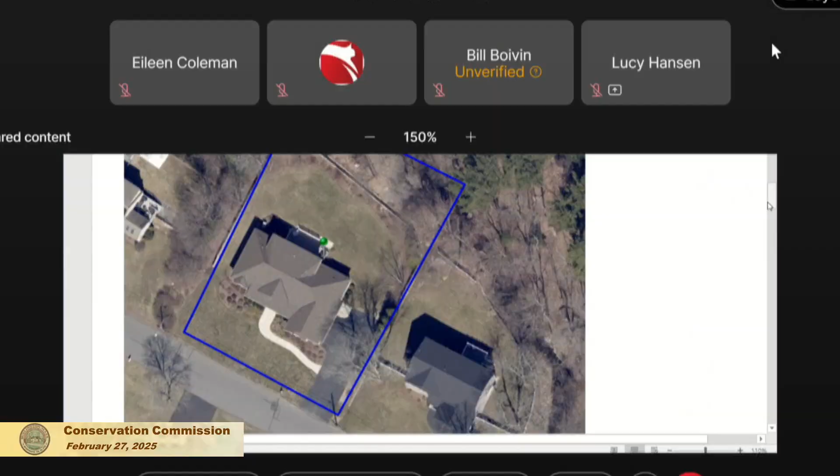I would like to submit something that we just got from the contractor, from Pandolfo, if I could give you that. It's actually a letter that serves as his written guarantee that all the construction regarding the building of the new home for the Gallaghers was completed as per the plans approved by the town. So he has your letter that says that, and also he has documentation of the invoices for all the materials. Can I give that to Eileen? Thank you. Great, thank you for doing the extra legwork.

Okay. Eileen or Lucy, you have any comments on this one?

Only to say, David Romero did his best, given the fact that it was a few years ago, it was complicated, there were a number of changes, like he just explained, and there was no way for him to see underground without digging up the yard, just to confirm that the chambers were built.

We went out there yesterday. You could see one of the red osier dogwoods that was required for the order of conditions. The rear behind the fence is looking good, it's looking clean, it's looking clear. There's not a scrap of yard debris or any dumping back there. Trees and shrubs in good shape. We couldn't see the yard under the snow, but it all looks very well kept, and they clearly do not touch behind the fence where the stream is.

I have no issues with issuing this certificate of compliance. Your question was just about the chambers - how do we know they were built? It's tricky, so I think this letter is about as good as you are going to get in terms of determining that they were put in as designed.

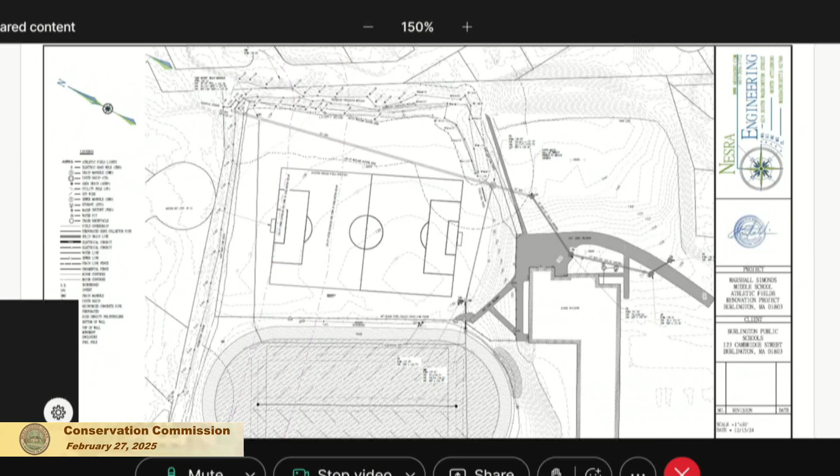There is an access drive by the school with a turnaround pedestrian walkway that connects to a residential neighborhood. And there's resource areas on the north side and the west side, and the facilities used for recreation and sports. It's a natural grass field.

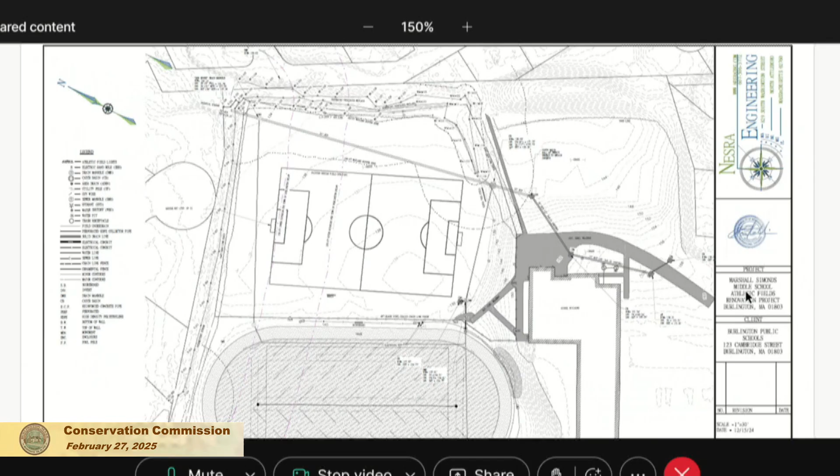The left side here is an intermittent stream, and we understand for Burlington bylaw that is treated as riverfront area. So it's mapped with a 200-foot riverfront, and then the wetlands have their 100-foot buffer zone. And I think we have the smaller buffer zone there, 5 feet if I'm not mistaken. I can't see. And if we go to...

Can you point out the 200-foot riverfront on that? I'm having trouble. Sure, it's right here, right up between there. Okay, thank you. And then the other 100-foot buffer zone is here.

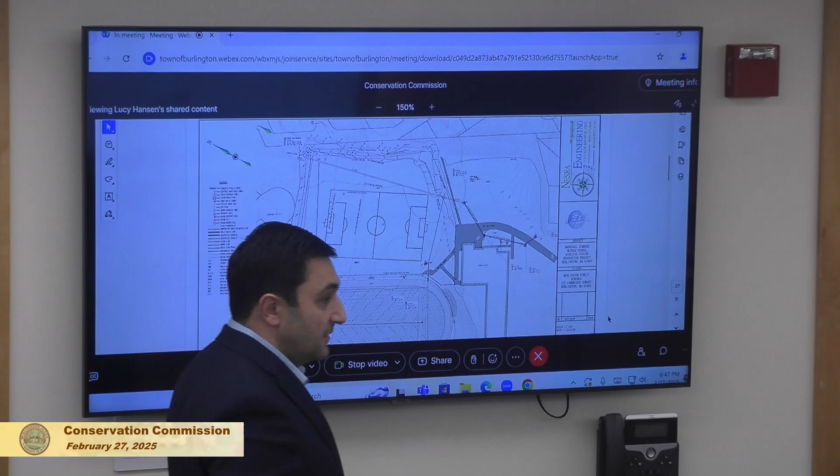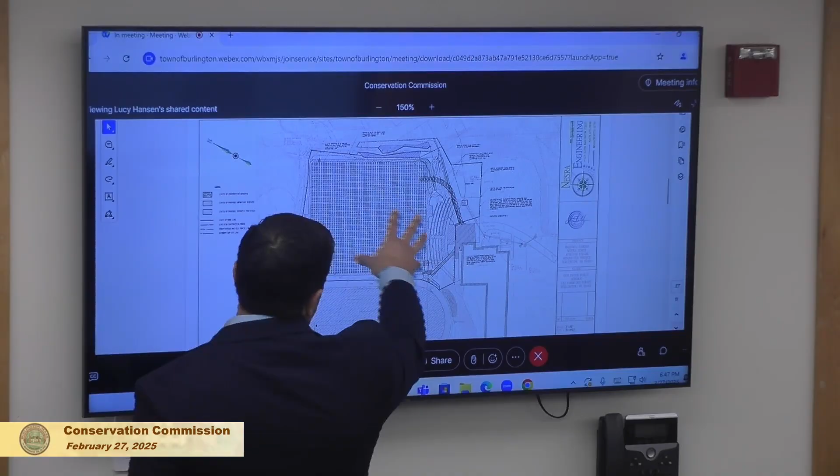If we go to the next sheet, this is our demolition plan. What we propose to do is remove a section of the pavement by the school building to regrade and provide ADA accessibility in that area. We're proposing a construction entrance from that location. We also have an alternate route if things get congested or closed out from the track side.

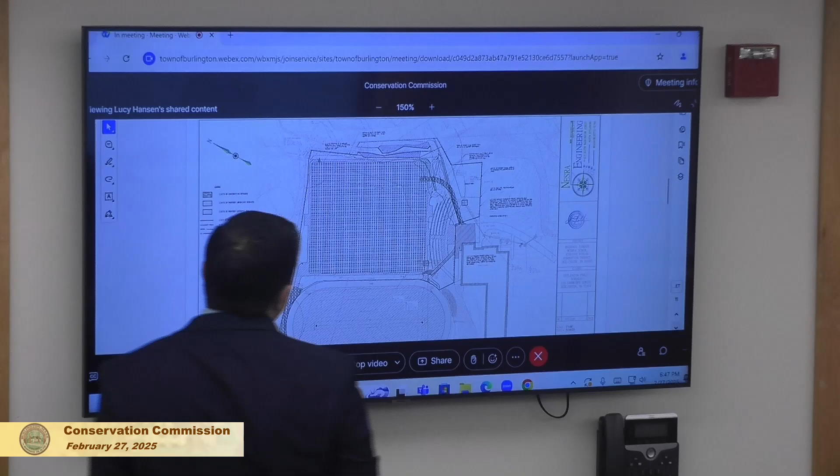We propose to remove the topsoil within the proposed synthetic turf and walkway areas. The organic material decomposes over time and isn't suitable to be underneath fields. So that will be removed, stockpile tested, and taken off site.

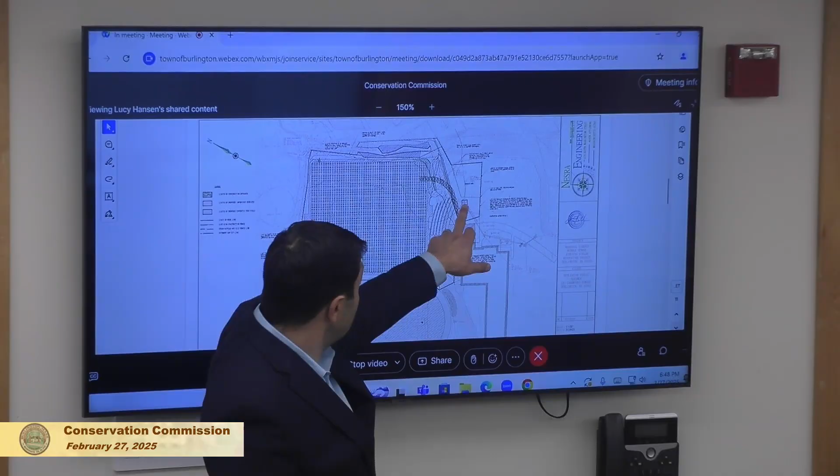We do have erosion control around the perimeter. All catch basins will have silt socks and protection with wattles around them. This one is currently filled with debris, the pipes aren't visible, it's full of dirt and sand that's washed off the parking area. We propose to fully clean it, inspect it, and replace it if need be.

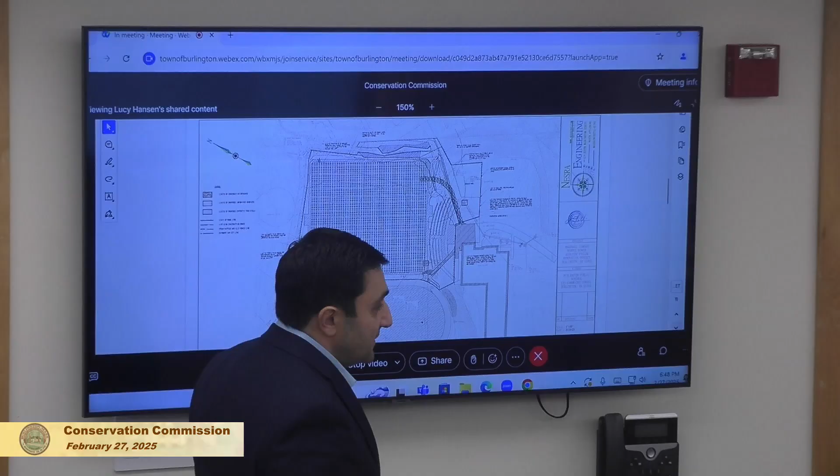There's a structure here that has some plastics and cups, etc. We propose to clean that as well, and some of the line is to be replaced. So now if we go to the next sheet, this is the proposed layout.

These are two synthetic turf fields divided by removable netting down the middle, so it can be removed and orientations can be reversed or changed based on practice needs, or fields could be split into fours for practices and so on. The red is just red turf to designate safety zones for out of bounds, while the green is just green synthetic turf.

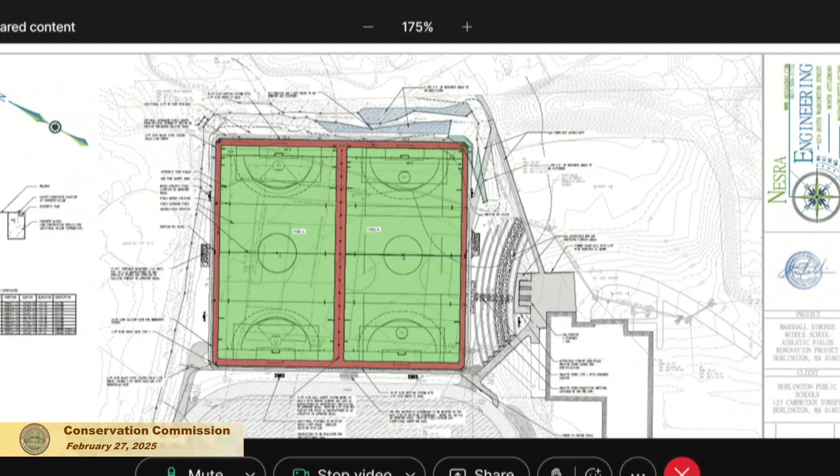We're proposing to provide an ADA accessible walking path all the way around, a 6-foot wide walking path. We're also proposing to improve ADA access to the neighborhood, make it ADA compliant, and come down to the field this way. So you'd have ADA parking, walking or going down the ramp, coming across here, with some spectator seating on either side, as well as terrace seats.

The two concrete areas in between the seat walls are ADA accessible routes for seating; the rest will be vegetated. We have a rain garden proposed in this corner, which will intercept runoff from the parking and turnaround, which currently has no treatment and goes directly into this catch basin that outlets into the resource areas. So we're proposing a significant improvement for that area.

We're providing emergency access over by the track and to the field, should there be a situation, and better connectivity from the track to the turf fields.

This is a section we discussed as potential wetland replication, but there's another area down here by the track which may be better suited. We're open to board suggestions, and we can go back and modify that to meet any requirements.

At the last meeting, the informal one, there were questions regarding whether we're getting any closer to the resource areas and what our separations are. Currently, there's a fence line all the way here.

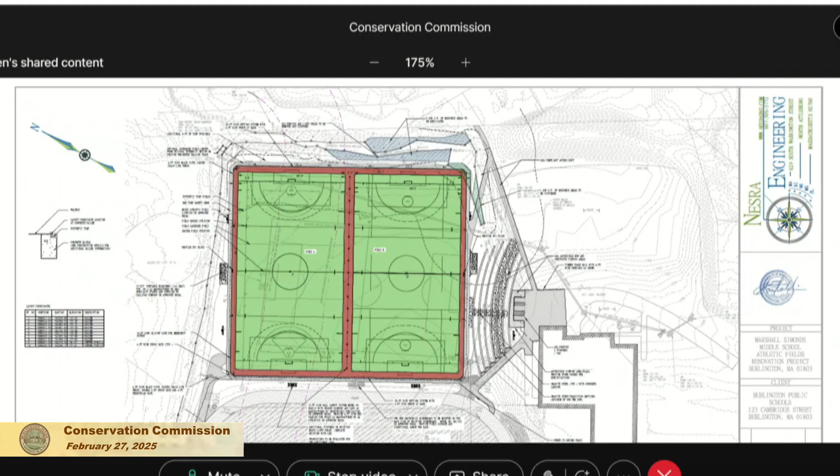In here, there's fence blocking potential wildlife pathways. We're not sure what that serves or why it was there. We have some photo documentation. We want to remove it if possible, to open it up.

There are some entanglement possibilities where the fence is folded over - it's a tripping issue, things can get stuck, and it could be not beneficial to animals. There's quite a bit of rubbish out there, some tires. We're proposing to do a full cleanup of the resource area. This work would be done by hand by the contractor, who would go in and remove everything they can and put it in a dumpster.

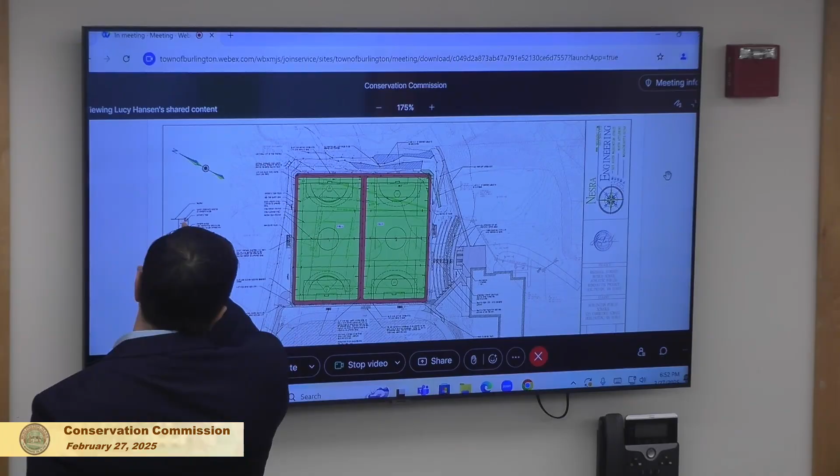This curb here - I have a section to talk about how we retain the infill, but I wanted to show a detail of the curbing. There's a lip to the curb, and the turf sits somewhat lower than that lip, so if there's any motion or migration, there's an area all around the entire perimeter that would catch the infill migration.

It's hard, it's very hard to see from here. Sorry - is there any chance you could point at that one instead?

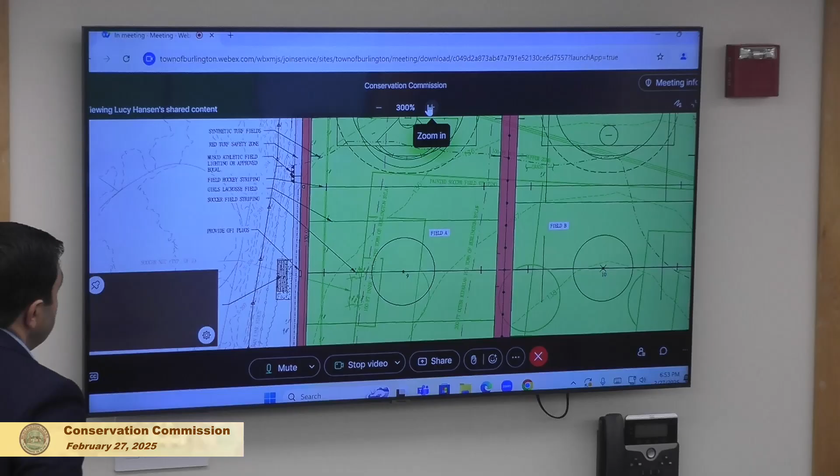Yeah, sure, this one is easier to see, there's a big glare off that one. Yeah, I didn't quite understand that.

Do you mind explaining that part again about the lip?

So this would be the walkway, this would be synthetic turf. The synthetic turf is held by a curbing system that goes around the entire perimeter, a concrete curbing system. The infill will not be set all the way to the top, it will be set about a quarter-inch below, so any migration, small amount of migration, would be trapped there.

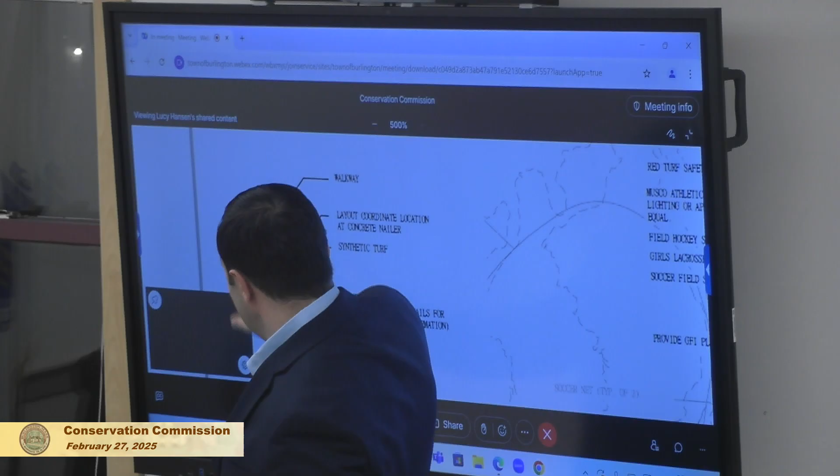Part of the maintenance would be to rake that back if need be, part of the typical field grooming and maintenance process. If it was to go over, you would see it on the curbing - there's a fence post here, it would get stuck on the curbing or pavement before it hits grass. So you'd see it on the 6-foot walkway. Exactly, you would have to cross the walkway, which is around the perimeter.

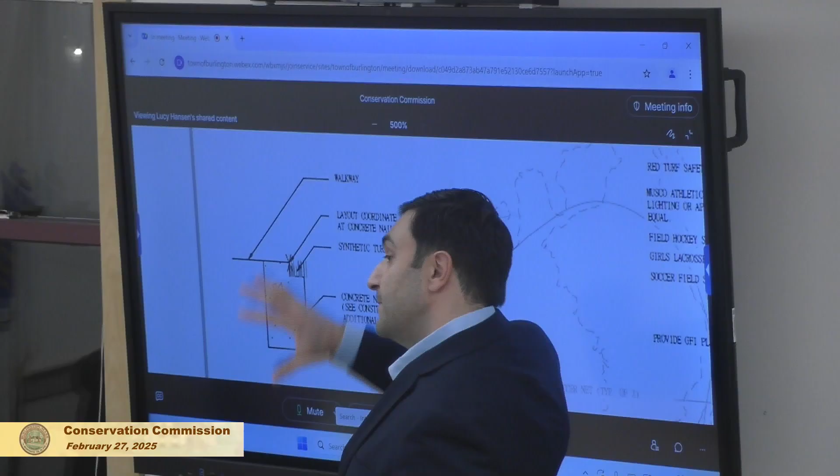Then we have grass channel swales in many of the locations at the low points, which would be the third place it would get trapped, and that would be part of maintenance as well. Then if nothing was done, it could migrate to the resource area. So we have checks along the way to stop this, if it was a concern.

We also addressed it with the turf, which I have some slides for you that shows monofilament turf versus slit film turf. Monofilament is individual fibers. Slit film is a section of fiber like this that has slits in it and folds over.

So the monofilament holds the ball up for better play. The slit film folds down and traps the infill in place. That prevents movement under your feet too much, so kids don't slide as easily, they don't roll their ankles, they don't get hurt, but it also retains the infill in place.

So it has both of those fibers? Yes, so the committee decided on a dual fiber system to provide both benefits.

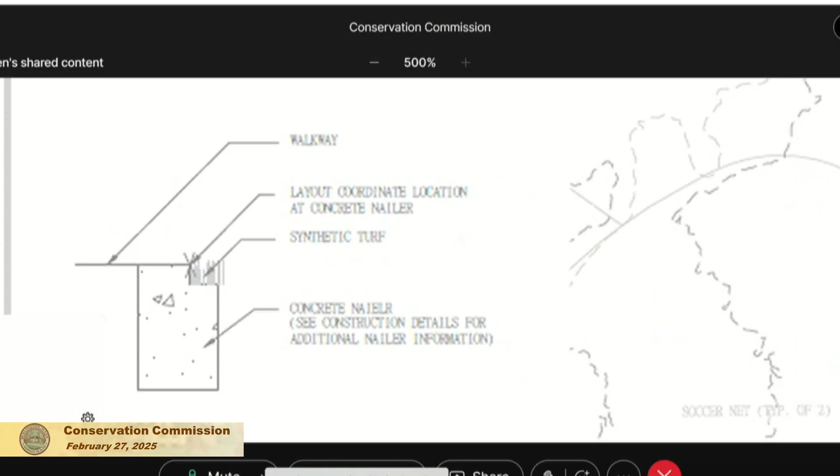Thank you, before you move on from that - you mentioned there's the lip and the walkway, and a swale? Could you explain that, the grading, I missed that one. We're not there yet, it's on the next slide. Do it at your pace, I'm sorry, go ahead. Zoom all the way back out. If you weren't going on to that next, don't worry about it.

No problem. So this side is the high point of the field, at roughly 139 elevation, I think it's 138, 37, 36, this becomes the low point.

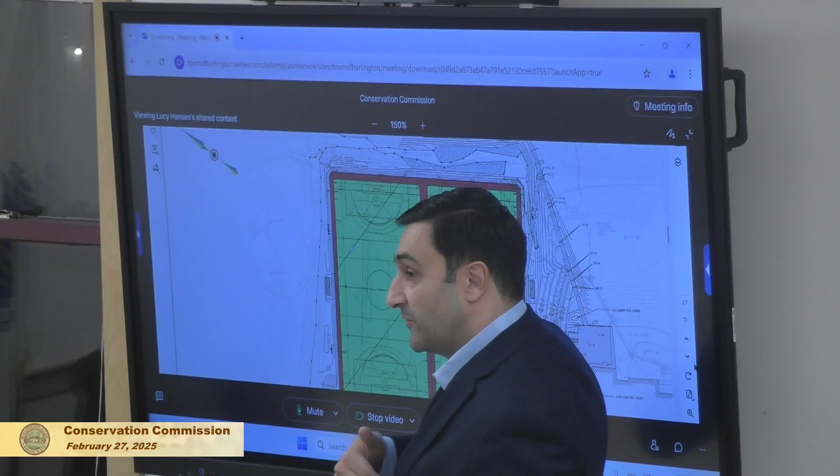And we have a swale created here to reduce any runoff that may sheet flow off the field, which isn't likely, because the way the field's going to be designed, most of the flow is going to be vertical. But in an event, if there is a significant flow, it would go to this area, slow down, and go out this way. This is part of the grass field now, so we're not encroaching towards the resource areas with our walkways or turf, but we're going to propose to utilize that area to catch runoff.

Similarly, we're going to have a low point here and here. So any of this runoff would be directed to this. And if there happened to be migration, those would be the locations to go clean and maintain.

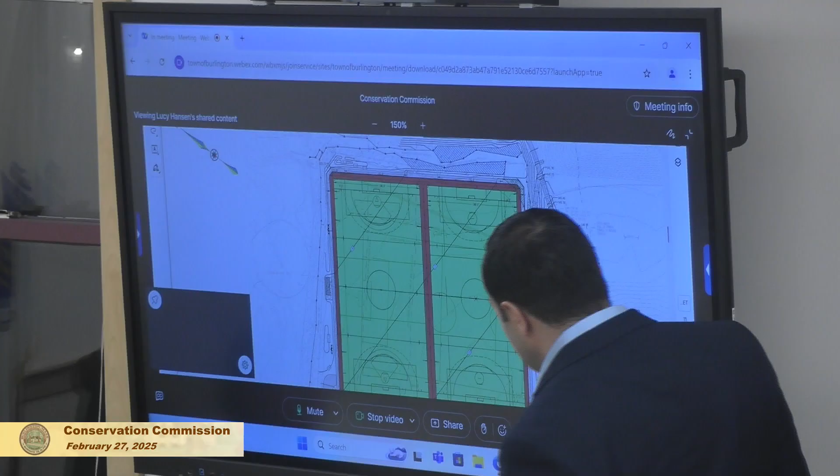For the parking area, you can see the sheet flow travels this way, across the spaces to the rain garden. We have a detail of how the rain garden will work - it's a depression with plantings. The catch basin is elevated, so that would have to fill up before it goes into that. It promotes infiltration through the specific soil that's for rain gardens, to a perforated pipe, which then outlets to that catch basin, which we're proposing to clean and replace.

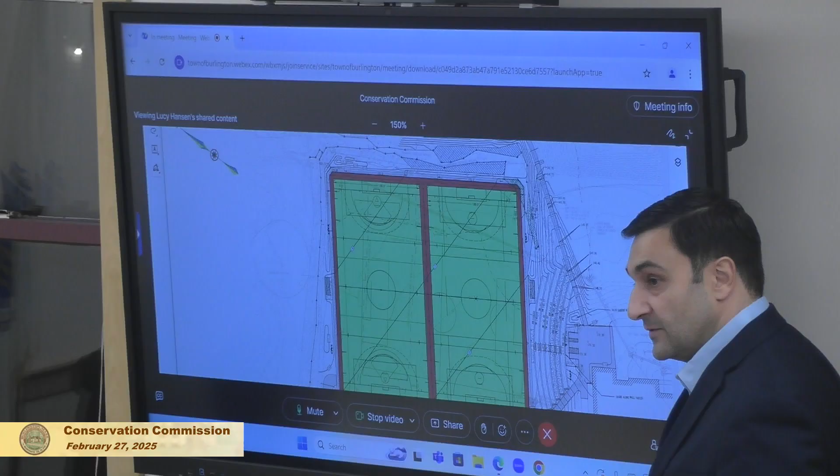Where's the detail of the rain garden? It's on the very last sheet. Is that one next? No, I believe it's there, I just hadn't noticed it yet. Sure.

If we go to the next slide, this is our drainage and utility plan. These dark lines are what's called flat panel drains. They're 12 inches wide, about an inch high.

These dashed lines are the flat panel drains. They go under the turf carpet, under the stone, above the filter fabric. Is that like perforated pipes? Yes, they have openings, but they're wrapped in filter fabric.

The turf has an infiltration rate of greater than 70 inches per hour. The base we designed is a minimum of 25 inches per hour. So the intent is when rain falls, it travels vertically in, through the turf fibers, the sand and crumb rubber, or whatever infill system there is. There's a backing, a 2-layer backing with perforations, which filters through that. Then there's a denser drainage stone, still very permeable, but a smaller material so you can laser grade it perfectly for the field.

Do you have a section? I do, and we can go through that at the end with the rain garden. The intent is to have these flat panel drains flowing into collector pipes, which are perforated pipes in stone trenches, which then ultimately come to this structure we're proposing to replace. That's the same structure that receives runoff from the parking area and upper grass area. So we're proposing to outlet to the same location, which already flows to the resource area. We're not cutting into the resource areas or adding any new piping into it.

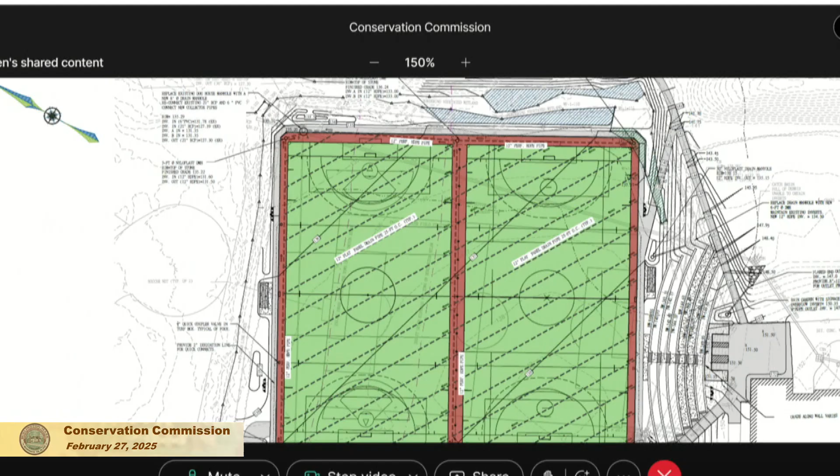You mentioned the fixture in the upper left of the field that's going to be replaced. What is it being replaced with? A new 8-foot diameter manhole. Currently the manhole is built out of cinder blocks, it's not in good shape. I don't think it'll last more than 10 years, and we don't want to put a multi-million-dollar facility so close to it and risk damaging it. It also doesn't have a deep sump, it doesn't have a hood. We propose to add those things.

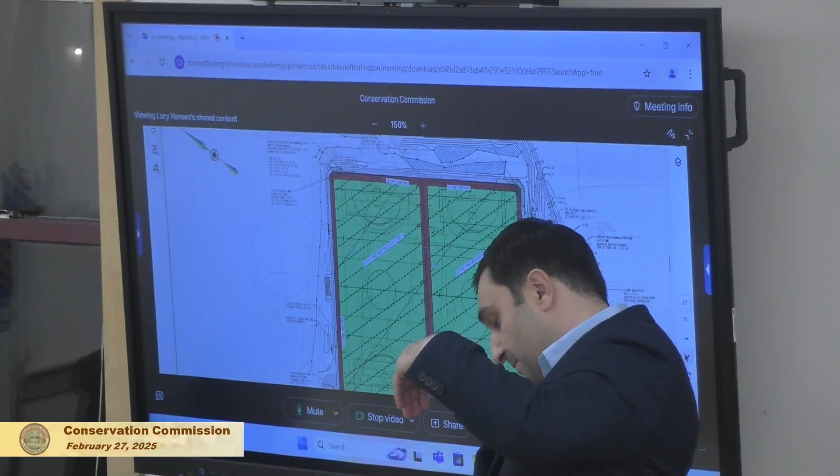The hood covers the outlet pipe, so if there are oils in the structure, they rise to the top and can't enter the pipe. Then there's a deep sump on the bottom, so any sand and heavier material settles to the bottom, and only clean water goes up through the hood and outside. It's fairly standard, but that's what we're proposing to replace - a catch basin, not necessarily a manhole, but a similar structure.

It's not a water quality unit per se, though I think similar catch basins provide 25% treatment according to DEP. This catch basin is feeding - the leachate is being collected there, yes, everything underneath will be. And the parking lot too? No, the parking lot ultimately gets there, but it goes to the rain garden first, then to this catch basin, and then connects there.

So it goes through the rain garden first? Yes. Got it - so you have the pipe from the rain garden to that point? Yes, we have the pipe for the catch basin structure, and any surface flow will get there as well, but everything's directed to the rain garden first. It goes underneath the turf, the pipe from the parking - yes, it's pretty deep, well under the field. The drainage from the lower field also connects to that same location, same pipe, further down.

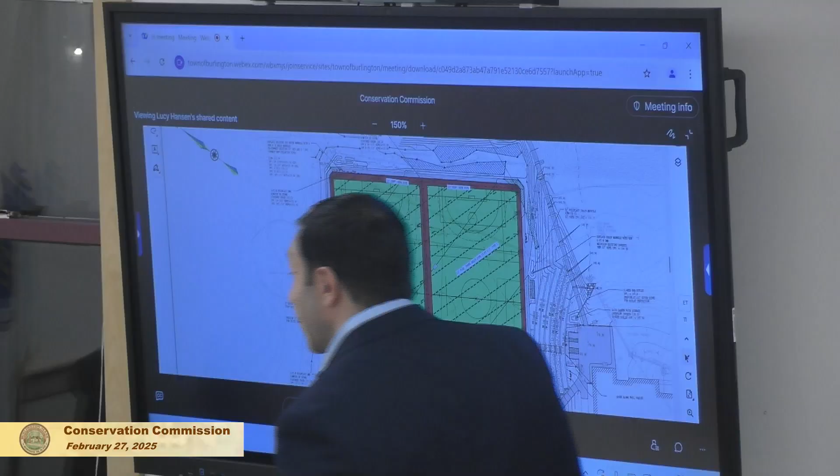In the future there's some talk about renovating the lower field - would that require any drastic changes in drainage? This field is connected through here, so that would remain unchanged. The larger lower field renovation should be limited to removing the infill and fabric, putting new fabric down, and redoing the track. But you're not changing the turf? Not at this time, but that's something in the future. And not changing the grade down there - no grading. If in the future a pad is put down, a thin layer would need to be removed to make room for it.

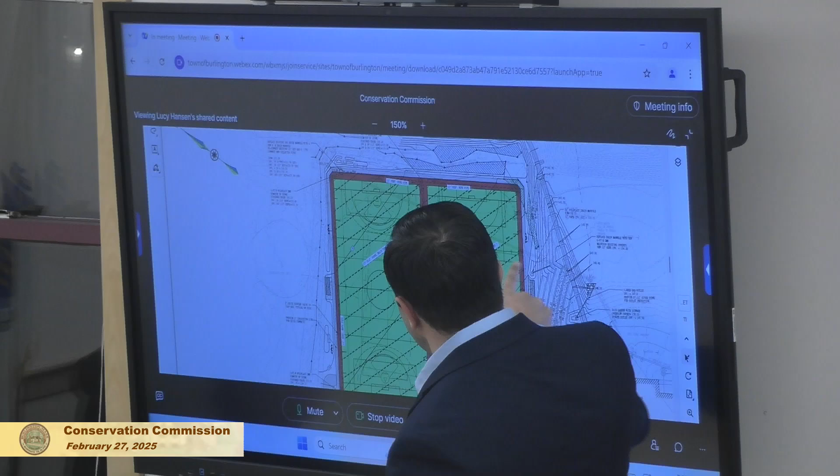Is that pipe currently being used for drainage from the field from the cinder block drain, and not the one that's filled with debris mostly? So yeah, not much is getting through there now because it's filled. There's another catch basin here that we were able to expose and look at, so that's getting runoff from the walkways and this hill. The rest from the lower field is coming in from there, and then it outlets just into the wetlands, about 4 feet or so.

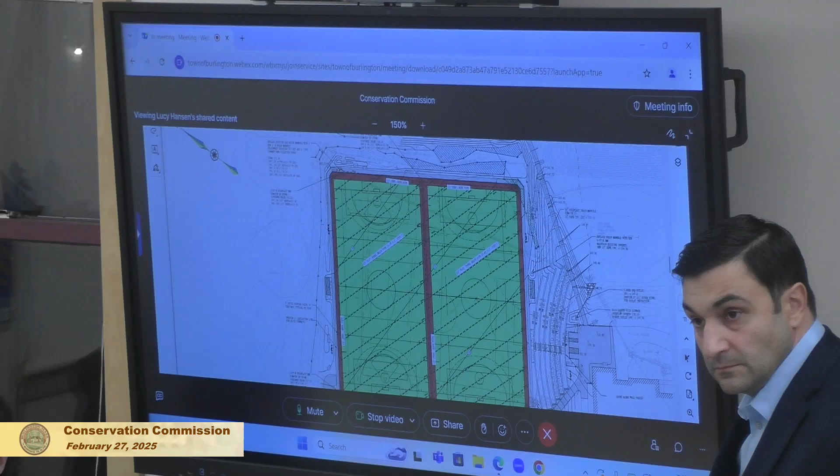Just for clarification, this pipe here is existing, and that is where, if this was working properly, that's where all the drainage would be exiting. So we are connecting to an existing pipe, we're just improving it. We'll show you some pictures, especially of what this pipe looks like right now, and photos of what we've uncovered when we inspected it. We do have that in the presentation.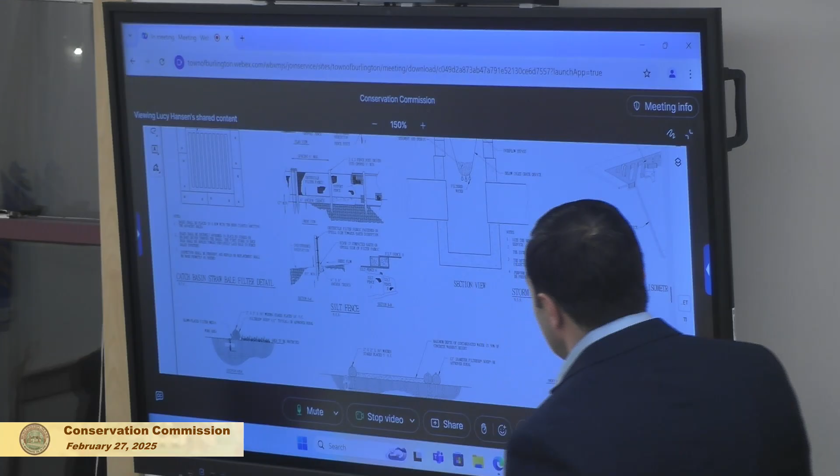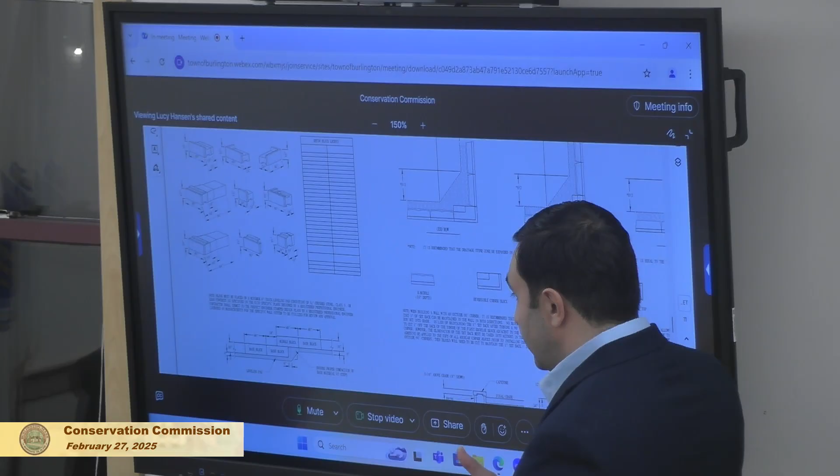If we go to some of the other sheets, this is the stone detail that we're proposing for the terrace seating. These are segmental blocks, about 2 tons, 16 inches in height, anywhere from 2 to 4 feet in depth depending on the height of the wall. Because these are very short walls for seating, they'd be 24 inches deep, and they have a lip so the soil can come right to the front face of the block. There's room for 6 to 8 inches of soil on top of the block, so it doesn't actually add any impervious surface.

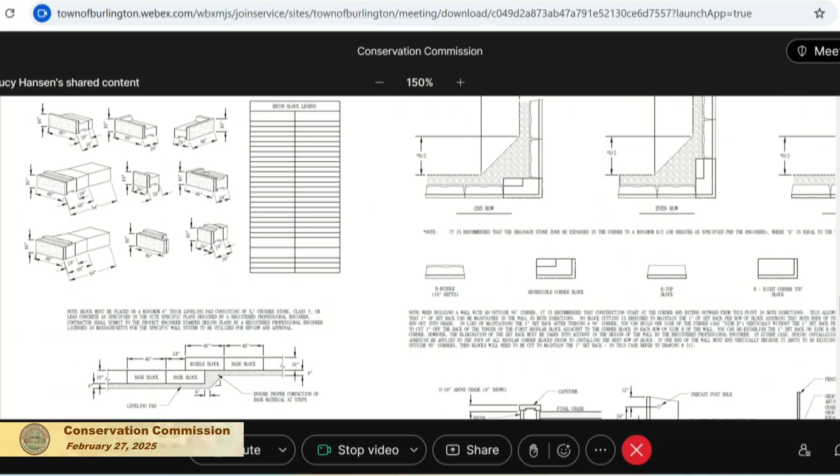Going on to the next. Do you have any pictures of that? I'm having a hard time understanding that part. Do you have some pictures? We may have it, it can wait till the next time. It's in the next slide. Yeah, okay, okay, yeah.

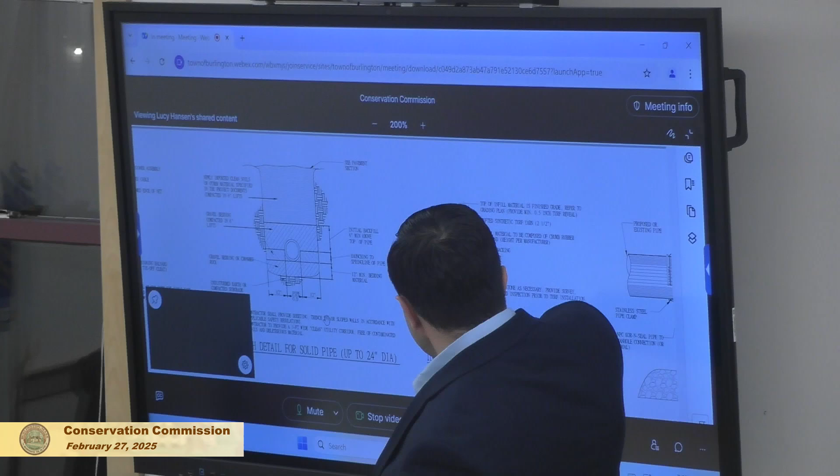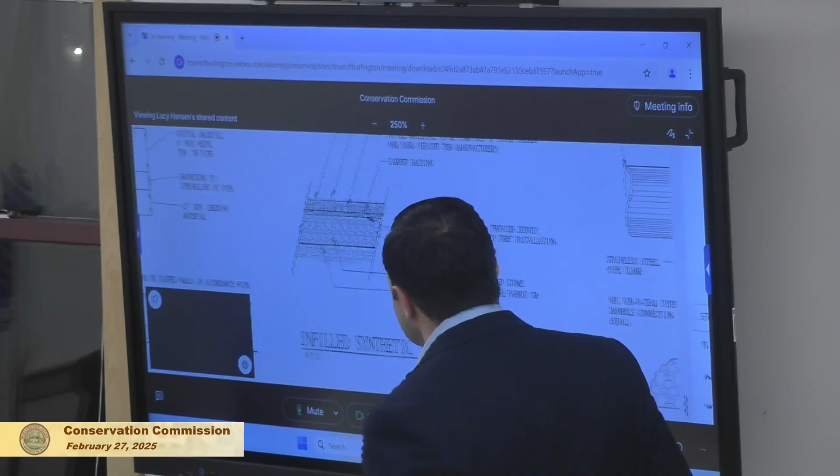So this is a detail of the turf system. There's a synthetic turf, the top layer, fibers. Could you zoom in on that a little bit? Okay, is that as big as it gets? I think it's bigger than that. I'm just trying to make it higher quality, which means zooming.

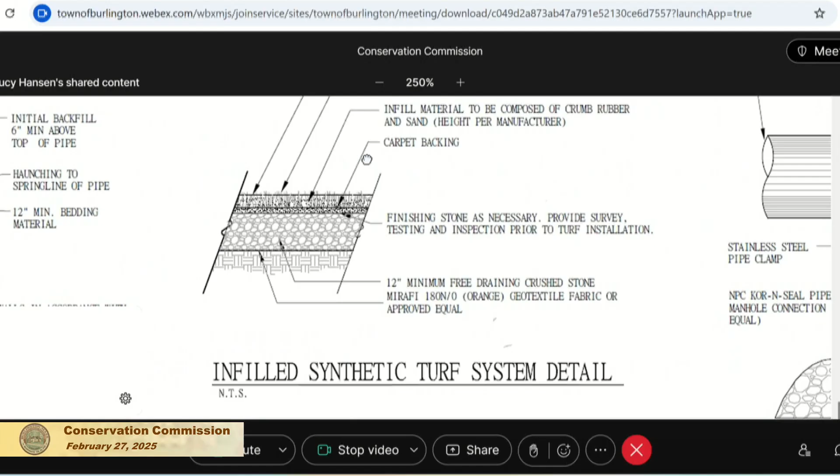Optimization. So this top section is where the fibers would be with infill. The fibers stick out approximately half an inch above the infill level. As I said, the slit film bends over and holds the fibers in place. The monofilament sticks up, and then there's the backing, a 2-layer backing to this turf system with perforations to allow water to flow through. This is what's called the finishing stone, the top layer, finer aggregate. Still very porous, but it allows us to get a smooth surface so there's not big humps and bumps on the turf field.

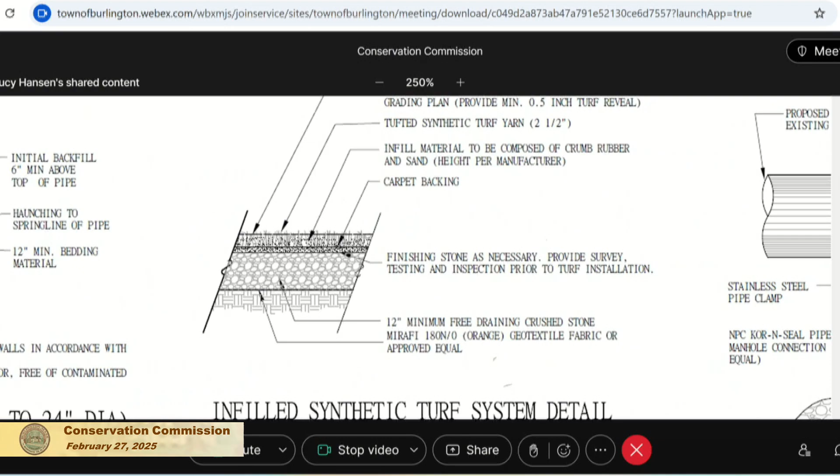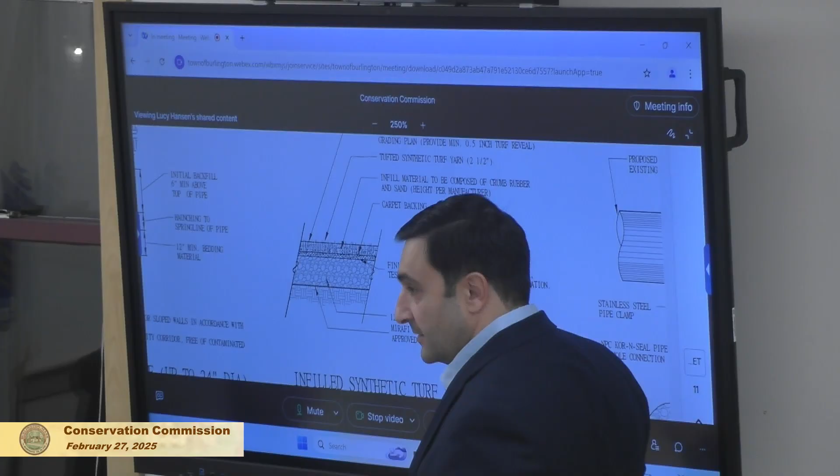Then there's 12 inches of drainage material above a filter fabric. So as runoff flows through, there are many layers of filtering. Not only that, it also allows for cooling of the runoff, because soil's typically at 55 degrees subsurface. By the time the runoff flows through, down to it, flows laterally to a collector pipe, down the pipe to a flat panel pipe, down the flat panel to a collector, then to the outlet. By the time it goes out, I think it's cooler than when it came in. How many minutes does that take?

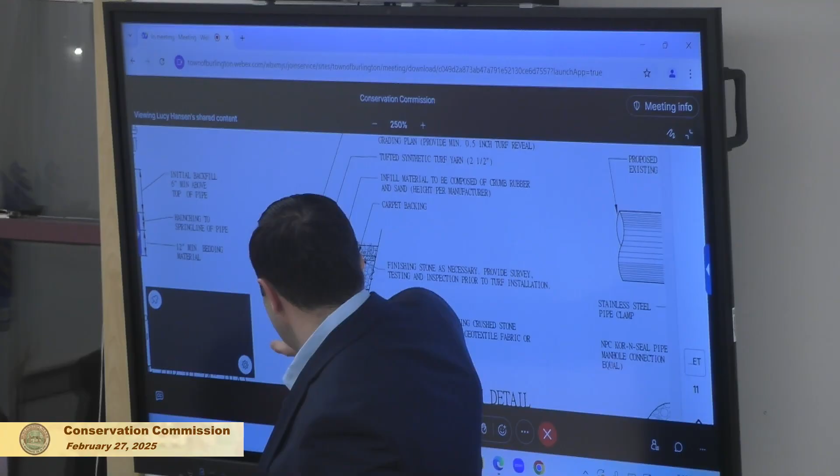So in our study, I believe from the furthest point to the outlet, it's 4 hours. Okay. The flat panel pipes, where are they in that elevation? Are they below everything there? The flat panels would sit above this fabric, under the stone, but they'll have their own fabric wrapped around them. Yes.

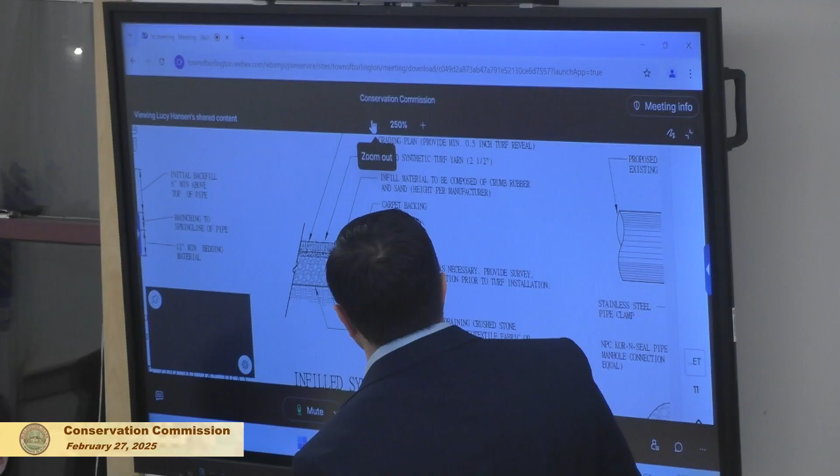And I think if we zoom out, there may be something else relevant here. If not, then on the next sheet we have some more. That's the netting, that's the connection to drain manholes, maybe something here. Okay, this would be a good detail to focus on here: at the very edge, where the flat panel comes to the collector pipe, that's the collector pipe.

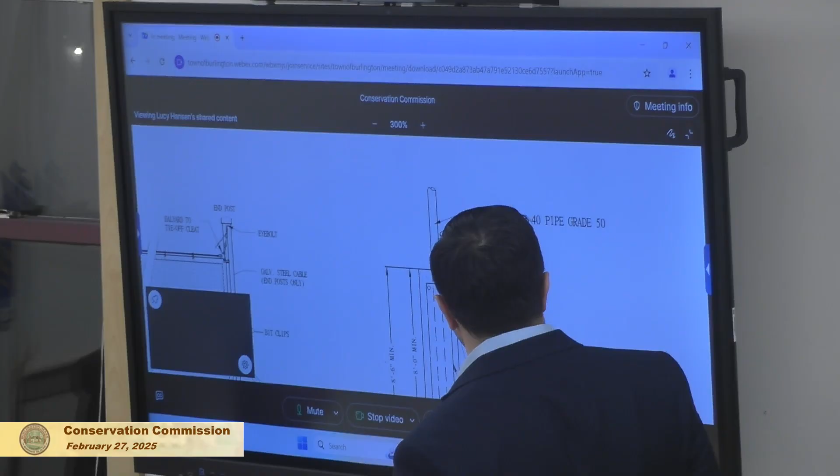The collector pipe sits about 6 inches above the bottom of the trench, which also has filter fabric around it. Runoff that comes through here hits the pipe, which has perforations that allow it to flow through the pipe to the ground. It will infiltrate through the filter fabric until this base is built up. Once that's all saturated, it will flow into the pipe and work its way to the outlet.

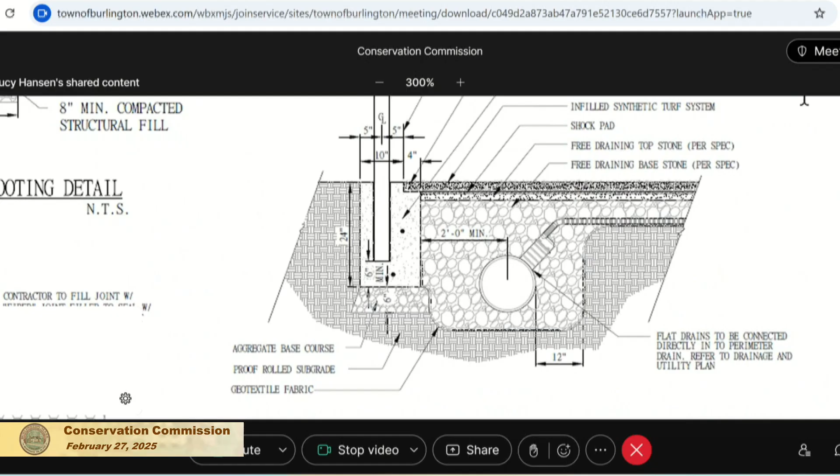This is the curbing I was mentioning in a previous slide, but it also shows the fencing and the lip here that it would go to. Again, this is filter fabric that wraps all the way around the side and the base of the drainage system. The flat panels also have filter fabric, and there's a mechanical connection—they have a special unit that connects them directly into the pipe.

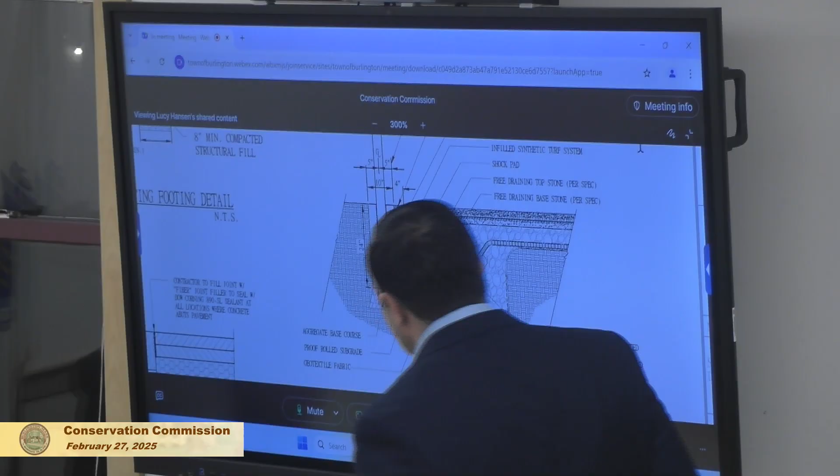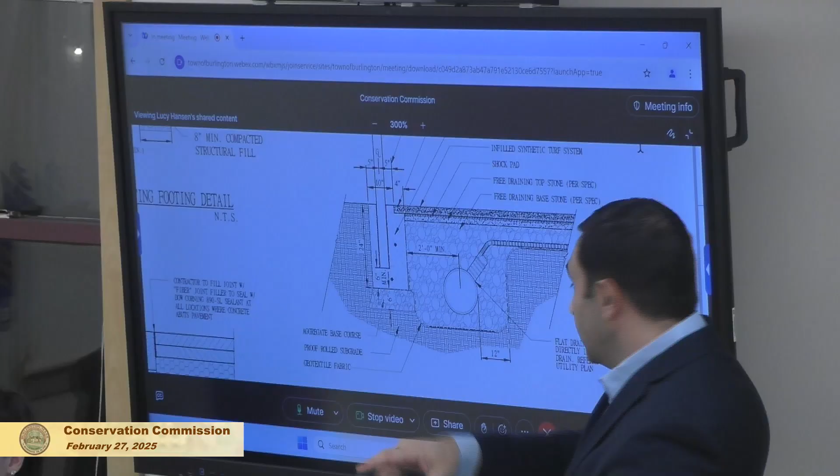Before we move on, I missed the very beginning of what you said—is that the pipe at the side? This is the collector pipe that goes around the perimeter. Okay, and these are the flat panels that are set every 20 feet that connect to that? Yep.

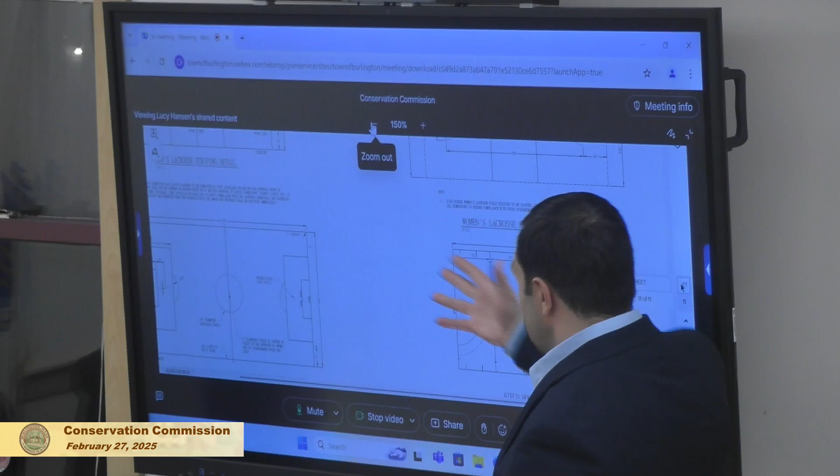I think these are the most relevant ones for our discussion. These are striping plans for the various fields. We've kept them to the lowest size allowable—in many cases that's allowable per NFHS, so we still meet the high school use requirements, but they're not bigger than needed, so we're not encroaching on resource areas any more than we have to.

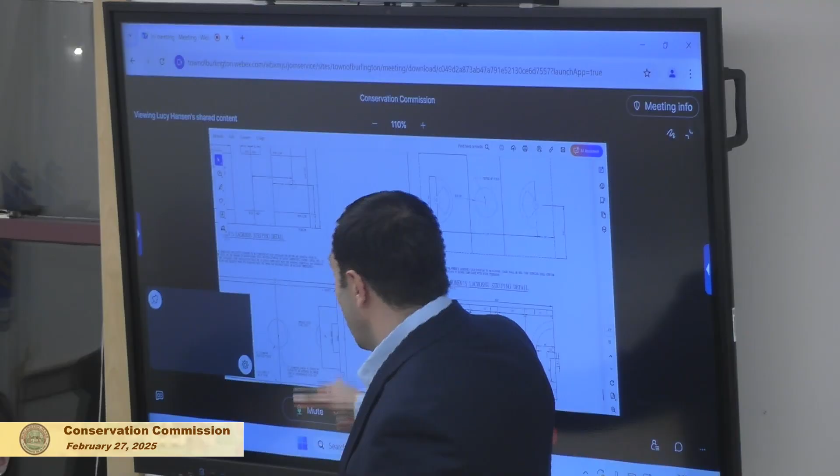Soccer has a variable width—it can go as much as 245 wide by 360 long. I believe we're 180 wide, which is the minimum if I'm not mistaken, by 330 long. The minimum for field hockey is the 330, so we're already governed by that anyway.

Going on to the next sheet.

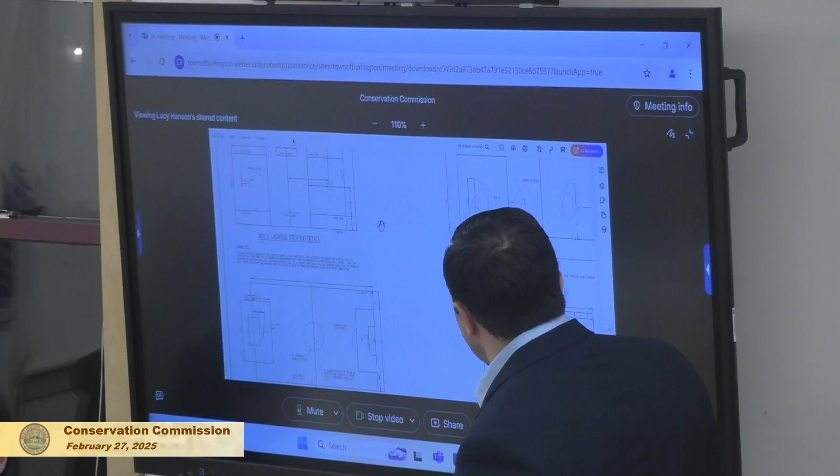Okay, that's over. I think this is the next presentation, but if we could stop here and address any questions you might have or have a discussion, I'm happy to bring in some additional slides for the discussion.

I'll give the floor first to Eileen or Lucy to see if you have questions or issues. The way we typically do this on a first hearing, we tend to note down what the issue is, not asking for an immediate response necessarily, otherwise we'd be here well past midnight. But it gives you an opportunity to think about your response and put it in writing. If it's something quick, you certainly can say it. Very good, that's the point.

We actually have quite a lot of comments and questions, so how about I just address a few of them for now, and then—we may have overlapping ones. Yes, we will list them as we go.

One question I have overall, it may not be directly what you just addressed, but you were considering this redevelopment, and I don't understand how you're coming to that definition. It doesn't seem to meet the definition of redevelopment under the Wetlands Protection Act, with the impervious—did we select that on the application? In part of the application, under some of the checkboxes for stormwater, you had said partial. It's a mix, and I still don't actually understand that. I think it's just new development.

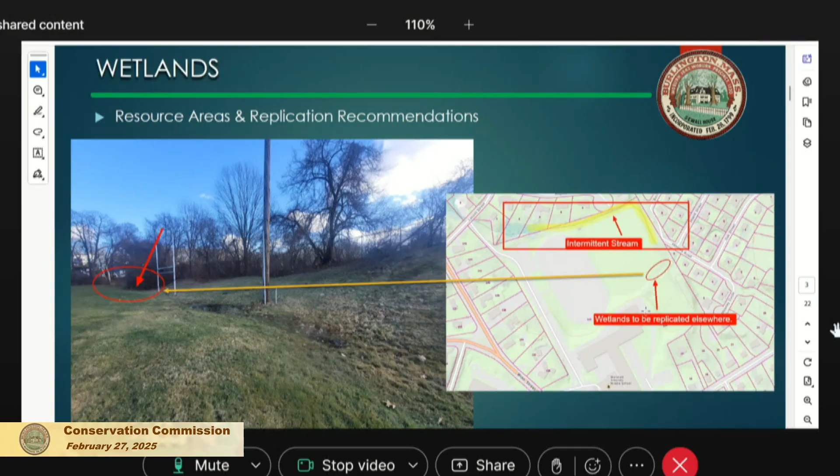So it has the parking lot going to it, it has the track and other field going to it as well. Can you see the inputs for it? Is it one pipe and one pipe, or would we know? I think we might have a picture if we go down a couple slides.

I'm just curious if you could test the inlet. These are some of the debris that's in the wetlands. That's the catch basin, whoops, that might be the intermediate catch basin. Where's that one? No, this is the one at the end before it outflows into the stream. Oh, is it? Yes, okay, so this is the one.

So the green pipe must be coming from the track and field, while way down on the bottom there's a pipe coming in from the parking area and another catch basin. This would be from the track, and this would be from the parking area.

And what's actually there now, I forgot about this, is the outlet pipe, the top is broken, and the water flows in that way to go out. So they never fully excavated it, this is what's called a doghouse manhole, they just set that structure on top, cut a hole, but it's filled with debris. This is the opening that water would actually flow into, but it's full of trash.

So we're proposing to remove this, cut the pipe on either side to make it fully flow, remove all the trash, and then make all the connections all over. The new pipe would be similar to the blue pipe that comes from the upper field - black, higher up, and easily sampleable. So you could sample directly from that pipe. Yes, you could. All right, well, you'll propose something as to what makes sense.

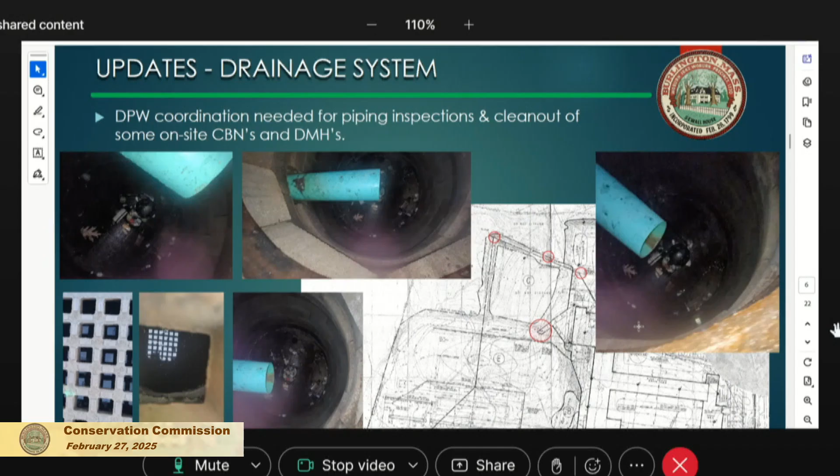The only question about sampling is whether the temperature of the sample makes a difference. If it's a cool day versus a very warm day, you're going to get a much higher likelihood that stuff will be in the water collected. So you might want to think about that - you want something representative of a more worst case than not.

I just want to make sure I'm understanding. I would assume they'd compare the temperature of the water to the ambient temperature and monitor those fluctuations, but is that what you mean? Well, what I'm saying is even though the water going through is going to be cooled, if you have a very hot spell it can get very warm in there, from what I've read. If that's the case, the hot water that filters through the chamber is likely to contain more contaminants because solubility goes up with temperature.

That's right, so you want to do it when it's warmer. Oh, that's what you're saying. Okay, that's what I'm trying to say - I may not be expressing it right, but you don't want to do it on the coldest day available because you will certainly get the best result. It may not show anything more, but it would be nice to know.

So you'd like us to take samples of the stuff coming out of the green pipe or the existing field and test that? That would be a good start, because that'll give us a baseline for what's actually out there right now. Yeah, I think you have to propose something - I don't think we should dictate the entire thing. You folks need to propose something.

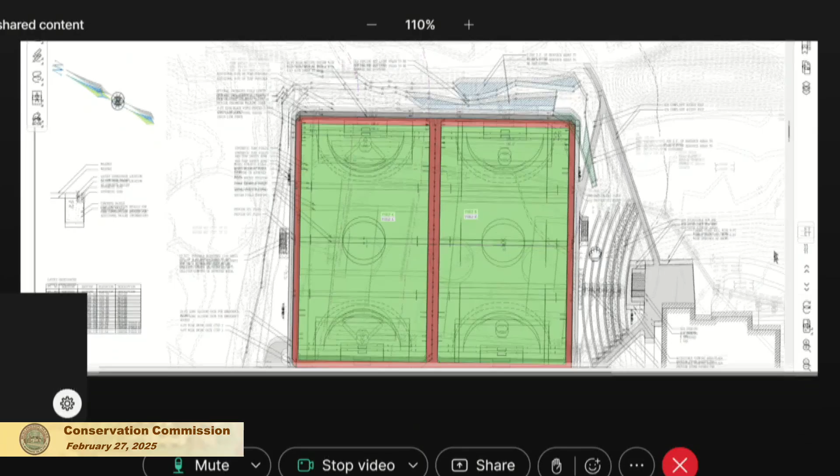Yeah, if you don't mind going to the grading plan, I can show you the low points, and those would be the best place to put them, if you intend for that to treat that runoff. I mean, I'd rather not see a connection of runoff off this field going directly into the wetland.

Go down one more slide - this one? This one. So the water primarily is going to flow here, so if we want replication, here, here, and here is where it's going to catch most of the runoff. I personally don't want that stuff going directly into the wetland - that's my point.

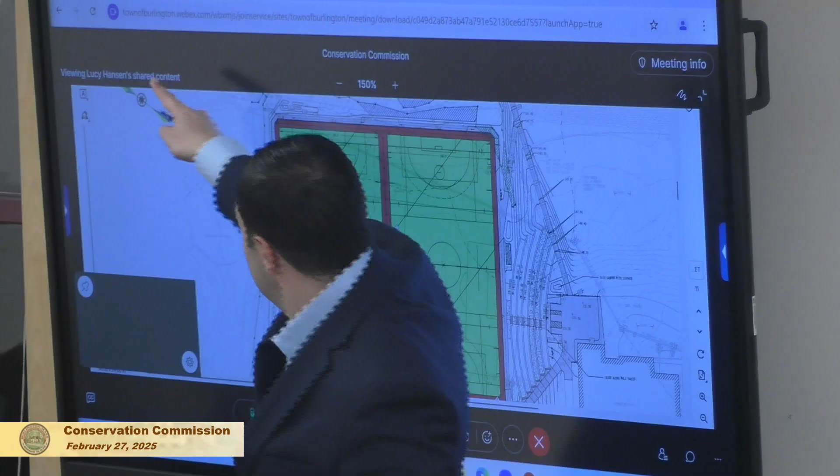Could we do something further south, I guess - further northwest? So are we using sheet north and south, or do we want to use that arrow? Actual north, I think she's talking about the bottom left of the drawing. South, oh west. Okay, this would be west. Yeah, so northwest, okay.

Providing a replicated wetland more adjacent to the old field - but I mean, it seems like there's quite a bit of distance. Is that better?

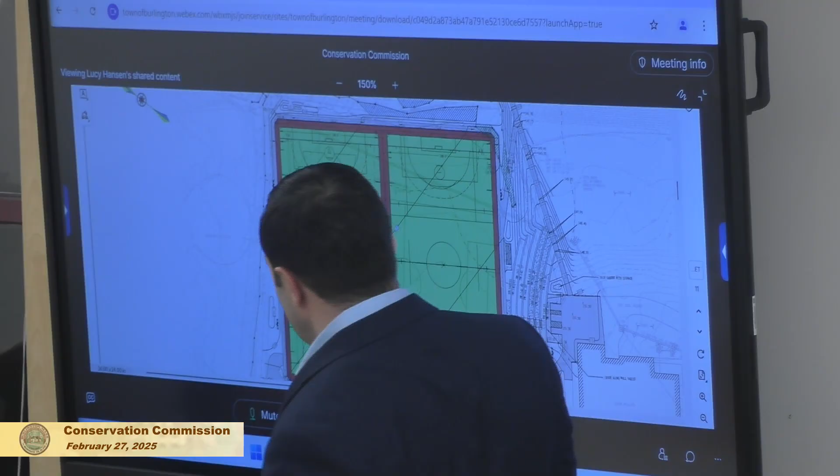I'm not sure. Who have you got working on the wetland replication plan? Stephen Chamil is our wetland scientist. Well, I would defer at least to some of his suggestions. He knows what he's doing, presumably with wetlands.

We wanted it to be fed, we wanted it to be hydrologically connected, but some of our concerns are we don't want potentially contaminated water getting directly into it.

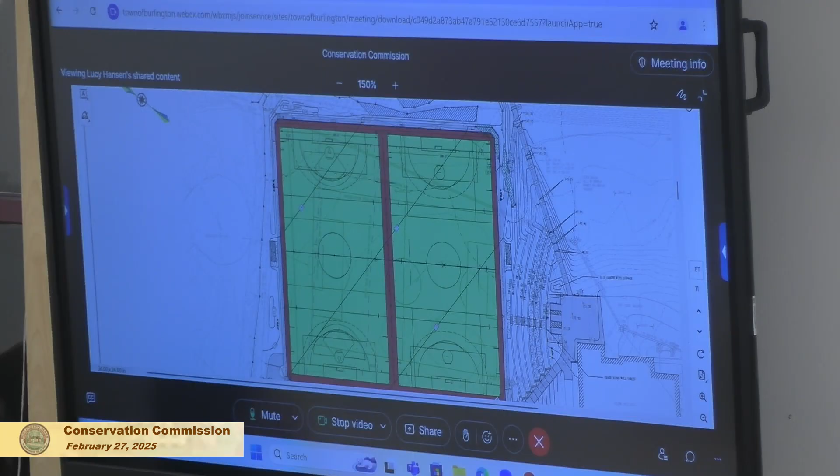My concern is just to be clear, assuming the maintenance is done, I'm reasonably satisfied that human health risk doesn't seem to be an issue.

Mass Department of Health actually said that they did a biomonitoring study, and the blood and urine samples of study participants on artificial turf fields, blood levels of metals were similar to the general population, and urine levels of polyaromatic hydrocarbon metabolites did not differ from participants on natural grass fields. It seems like there's not a substantial human health risk - this is the second source I've read that seemed to claim that.

So the issue for us to think about is environmental risk, since we've become aware that this stuff releases some highly toxic substances, in very small concentrations, into environmental areas. So if the design can prevent that, or we can locate the replicated area to prevent that, or do anything to stop untreated runoff with soluble contaminants from getting into the wetland, I'm all in favor of that. If we can't have a reasonable assurance of that, then it becomes more attractive to look at a different infill material.

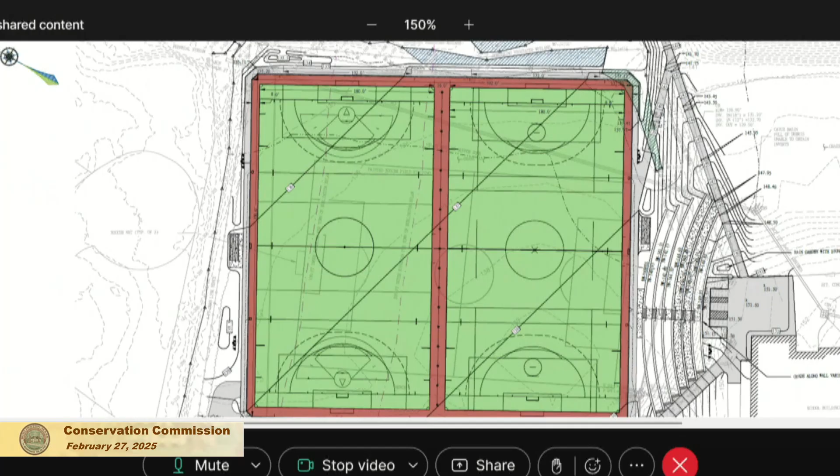Let's go through this list. Maybe we have enough—it might be enough for today. Sure, and then we can update our next presentation and include those. That would be, yeah, that's a good idea. Unless it contains all the answers. Some, but not all. All right, so I'll try to go through this, and I probably got some of it wrong.

The definition of redevelopment versus development—is that agreed? We're going to call it development? Yeah, I think so. That's fine. Okay, all right.

And the alternatives analysis—Sarah asked for grass, and we talked plenty about making sure you're comparing apples and apples with the same sort of lifetime of maintenance.

Estimated seasonally high groundwater, that has to be done when the weather gets a little better. We do have it, I think, in the borings. I want to say it's 5 feet down. We will, if needed, do additional test pits. So they've reached the previous wetland layer that's under there, which is approximately 5 feet down.